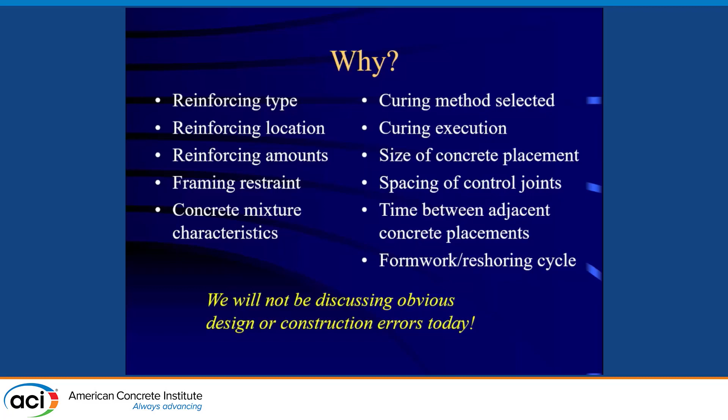I don't want to talk about that stuff today, because that stuff doesn't lead to conflict, right? When those types of errors are made, generally pretty quickly you know what the cause is. I want to talk about the stuff that winds us all up in oak-paneled rooms. So, that was the prelude to the discussion. So what I want to get into is to explore the kind of cracking that we see in a typical building structure, specifically related to the stuff that gets us all into trouble all the time.

I want to talk about what we as designers can do to reduce the risk of that conflict. And for those of you in the room who are also contractors who have face time with owners in maybe pre-construction reviews, or if you're doing design build work where you're actually responsible for design, some of this stuff may be important to you as well, okay? So, Calvin talked about concrete cracks. We all agreed that concrete cracks. No one dissented.

So there is a whole bunch of information in no less than 7 ACI documents that I found over the last 2 weeks talking about cracking and what expectations are. Here's a pretty good one that I like from ACI 302, and I'm sure you all can read, but I think this is important, so I want to read this one to you. This guide contains recommendations for controlling random cracking caused by normal volume change. Present technology only permits a reduction in cracking, not elimination. And here's my favorite part. Even with the best floor designs and proper construction, it is unrealistic to expect completely crack-free floors.

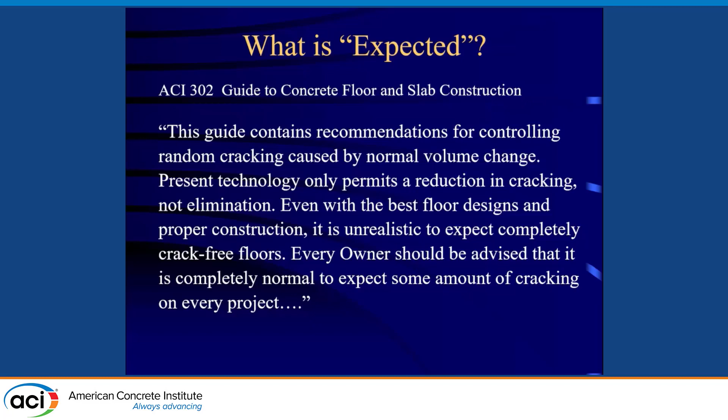So, Calvin started talking about this. Communication is extremely important. It is my personal opinion that you have an obligation to communicate with the owner what the expectations are. If you don't, I think you're putting yourself at risk. Especially with new clients. If you have a client you've done 10 buildings with, and you've had that discussion and everyone kind of knows, great. But with new clients, maybe not.

Surprises are the problem, right? If you have a discussion with an owner about what can be expected, and he walks out on the floor deck for the first time, goes, oh yeah, there's a crack there. I kind of expected that. You told me I'd see some of that. No problem. If you walk out with an owner who you didn't have that discussion with, he looks at it and goes, oh my God, that's cracked. Something's wrong. Who did it? You know, who's going to fix it? That's a problem. Same crack.

So, the one thing I would say, if you could just remember from this conversation with me today, is communication is extremely important. As a designer, there's usually a kickoff meeting with the owner on traditional design bid build jobs. Maybe you want to get that on the agenda. In our office, there's a whole bunch of things from the owner performance-wise that we like to go over. This is one of them. What's your expectation?

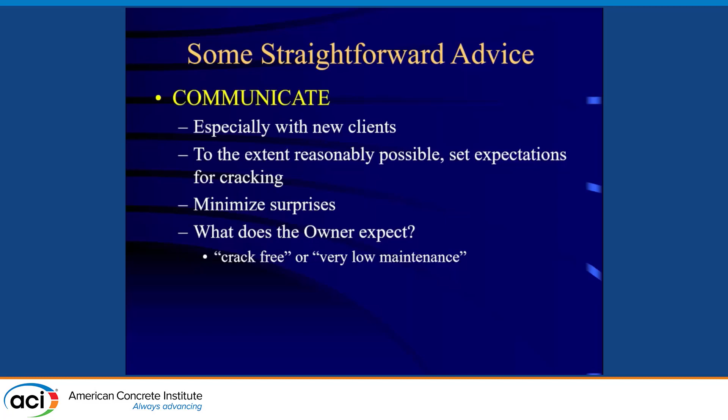So, what happens if you have those discussions and you realize you have an owner who may not be happy with the, let's call it the normal design construction approach? These are the things you should be discussing with the owners. And again, as a designer, I'm having these early on. As a contractor, you can be having these at a pre-concrete conference if you so choose. But to me, the first question is, what's that owner's risk profile?

Floor coverings. Calvin mentioned this carpet. We probably don't care. I'm 100% sure there's a shrinkage crack that's under our feet. We don't care. Right? If I have a raised floor system, you probably don't care. If you're doing a floor that's in an operating room that has high-end epoxy flooring over it, you probably do care. So what's going on top of that slab? Do I have a durability exposure? Am I doing a parking garage that's non-post-tensioned in Boston that's going to have a high chloride loading? I'd be more concerned about a crack there. I'd be less concerned if that slab was post-tensioned, because the cracks are going to close most likely, or most of them. So how does durability affect that issue?

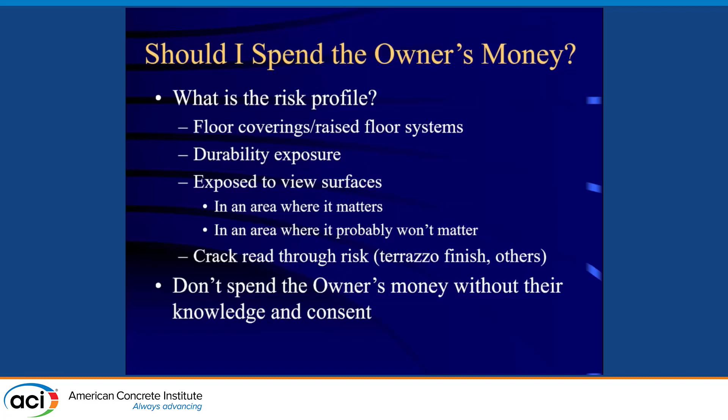Do I have a risk with my finishes? Do I have a slab that's going to support terrazzo? Because then I have read-through risk. Now that is an architectural risk, right? Because we know that cracks generally tend to read through that type of finish. So my whole point is we should be having this discussion. We should be assessing what the risk of that crack is. If that crack is going to cause someone pain, we may need to react to it. If it doesn't cause anyone any pain, we don't need to do anything else. Because the reality is if it causes someone pain, as Calvin said earlier, we're spending money to fix that. And by fix it, I mean in the design early on. We're increasing the design budget to do something special.

So, with that said, the usual sources of conflict that we see: elevated slabs, two types generally. Elevated slabs, reinforced concrete. Most people in the ACI world will call this a suspended slab, one-way slab, two-way slab, with or without beams, drop panels, all that good stuff. And we're designing that to ACI 318.

And for the designers in the room, we all know by heart, since we were born, that the minimum steel in that slab is 0.0018 times the gross concrete area of whatever section you're looking at for a slab, right? So there's a code specified minimum amount of steel that has to go into that slab regardless.

Slabs on metal deck are not governed by 318. They're governed by the Steel Deck Institute. There's a little document out called the Standard for Composite Steel Floor Deck Slabs, SDI C, if you really want to look into it. And the amount of steel I have to put in that slab is about half of what 318 requires. And the reason for that is they're expecting that the composite metal deck is providing some amount of reinforcing for shrinkage.

Slabs on ground. Most of the time, little qualifier, also not governed by 318. So there's a couple of different techniques out there. PCA's got one, WRI has another one, but again, generally speaking, the amount of reinforcing in those slabs is pretty low. In that condition, we're counting on the control joints to force cracking to occur where we want it to occur, where we find it to be acceptable.

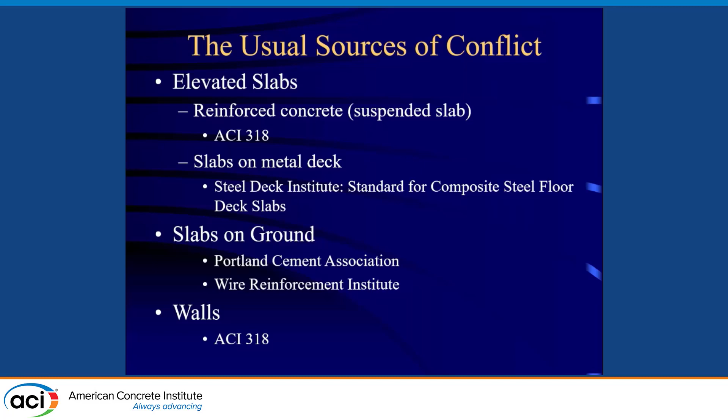And then, of course, we have walls. Long runs of walls are susceptible in the same way, designed to 318. For the rest of this presentation, I'm not going to talk about walls too much because they're very similar to the other items I'm going to speak to. But these are the items that we see where most owners wind up objecting to cracks that they find. So let's take them one by one briefly.

Elevated slabs. And I understand that there's all different kinds and definitions of cracking. Calvin had them all up in his slides, but when it comes down to it, for my sake, you can group them into three pieces. You have early age cracking due to volume change. Most of it's shrinkage. You can also get temperature. Not temperature change due to ambient temperature, but temperature gradient caused by the concrete curing. Right? Generally occurs in random locations, and in our experience, in our office, is the most common cause for conflict because it happens early, everyone's still on the job site, and everyone sees it.

Depending upon the formwork removal process, you could kind of have a little delayed reaction. You could have shrinkage stresses that don't quite get you to the modulus of rupture, right? Everything's still formed, and you have concrete shrinkage stresses that are high, but not at the modulus of rupture, so no crack. As soon as you pull the formwork, now the slab supports its own weight. So you have a superposition of the shrinkage stresses and the flexural stresses now due to the slab's own weight, and that could be enough to send you over modulus of rupture, and you'll get cracking.

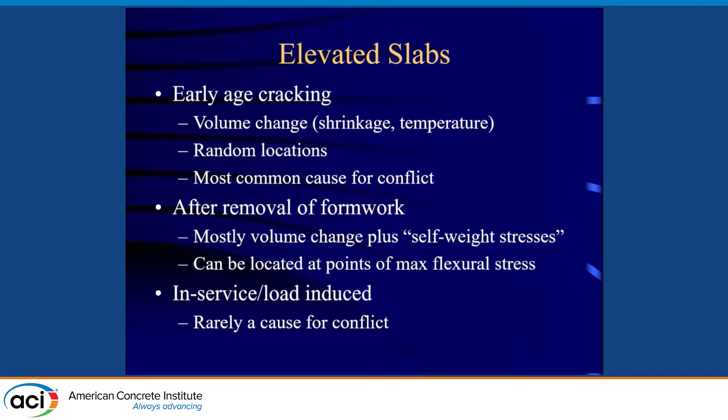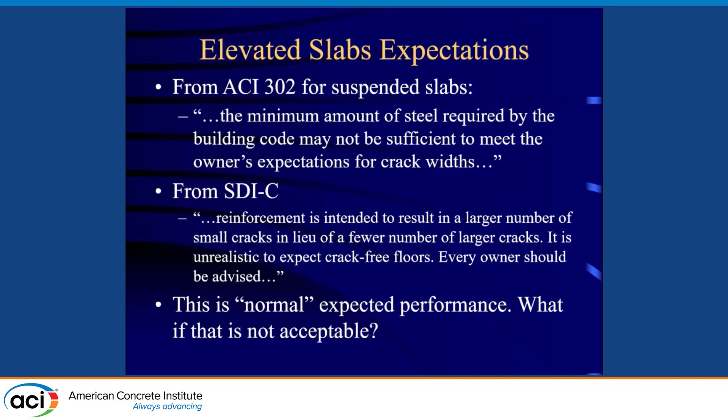Steel Deck Institute, this is what they tell you about a slab on metal deck. It's unrealistic to expect crack-free floors. Every owner should be advised. And I truncated it off because I ran out of room, but that's exactly the same statement out of 302 that you saw earlier. Exactly the same. So this is normal. So what do we do if normal isn't acceptable?

What can I do? I can change the reinforcing type. If I have a really bad situation, I have bonded reinforcement, I can add PT and close those cracks up. If I'm a slab on metal deck and I just have wire, I may want to add fiber in addition to it.

Reinforcing location. If I have a one-way slab with just bottom steel, you may want to think about adding another layer of top steel near the top surface. Reinforcing location, if I have a slab on metal deck and it's only reinforced with wire, do I really want the wire 1 inch from the top? Because if you do, that's probably a little bit different than what normal specs say.

Reinforcing amounts, I'm certainly in control of that as a designer. I can add more at a cost to somebody. Framing restraint. I cannot change the architecture of the building most of the time, so I can't reduce the restraint, but what I can do is I could add reinforcing across the plane that I'm expecting is going to crack as a result. So I could do that.

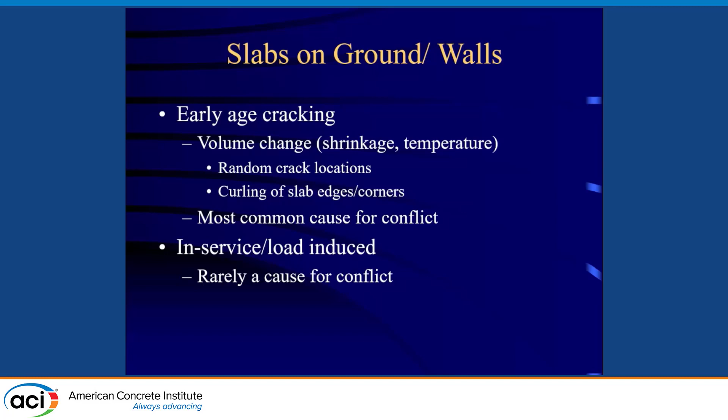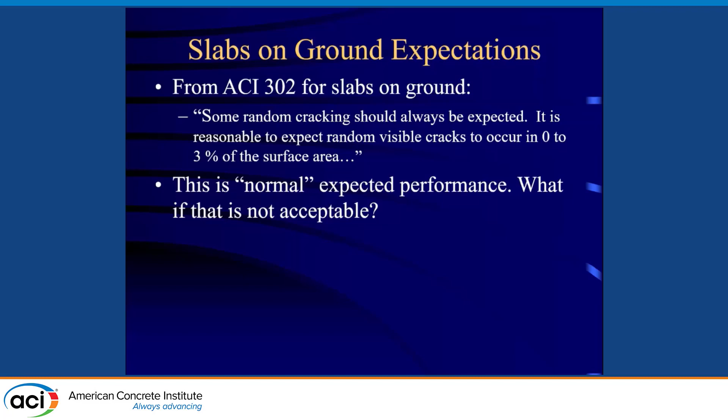Slabs on ground. Very similar discussion. The only thing that's different about slabs on ground is now I have this special thing called curling, which is really shrinkage again. But what's different about a slab on ground? Well, let's go here first. Same type of thing. 302 is telling you. It's even giving you a percentage. If you have that discussion with the owner, well, how much random cracking can I expect? Well, 302 kind of says about this. It's a starting point.

What can I do in a slab on grade? Same type of things. Reinforcing type. Same discussion as we had before. Location. Reinforcing amounts, although be careful with reinforcing amounts, because in a slab on grade, you can put enough rebar in to cause a problem. So I would suggest that you read 302 very, very carefully before you increase the amount of rebar you put in the slab on grade.

Concrete mixture we talked about. Curing. The big thing with slabs on ground, control joint spacing, right? Probably the most effective thing, in my opinion. I can tighten up that control joint spacing and reduce the risk of cracking. Again, it all costs money.

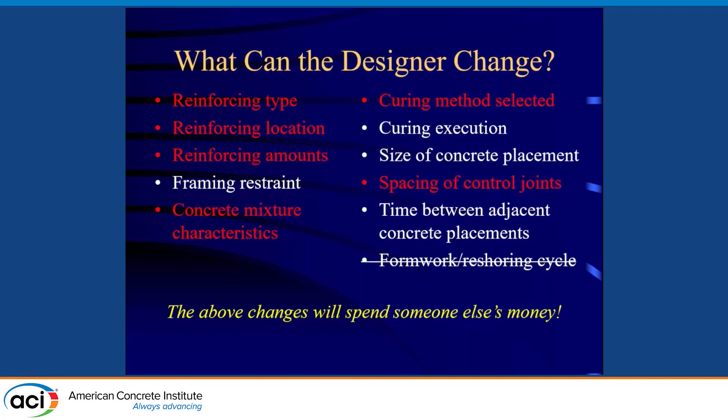All right. I've given you my perspective, fair and honestly. I have a couple more slides. I want to warn you, I am now getting on my soapbox. Okay? For things that really annoy me, and I want to bring to everyone's attention. And these are the things that, in the interest of all of us in the room, if we can work together and eliminate this stuff I'm about to show you, I think we'll all be better off.

So, communicate, we've talked about over and over again. You've heard it from Calvin, you've heard it from me. I haven't seen any of my future presenters' presentations. I guarantee you pretty well that you're going to hear it again and again and again and again.

As designers, I implore everyone in the room, don't embed conflict within your drawings. We see it time and time again when we're brought in to help fix a situation. Be fair and be reasonable in the drawings and specs you're putting together. The next slide is going to show you a specific example of one of about 8 things that I'm talking about, okay?